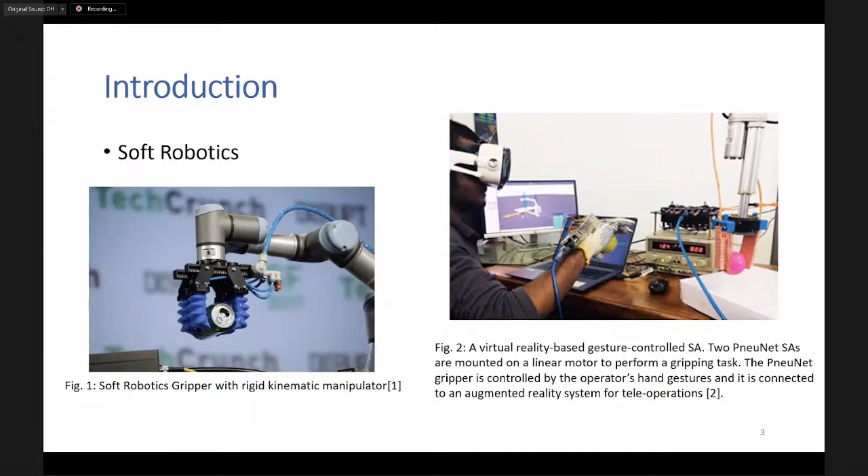So when we discuss parametric estimation of the PneuNet type actuator, we have to know about the bending behavior of the PneuNet actuator. Here is the PneuNet actuator. There are two types of layers in these kinds of soft actuators. The first one is the active layer. It can be used to inject compressed air for bending. And the other layer can be defined as the passive layer. It can be used as a strain limiting layer for the bending process in this PneuNet actuator.

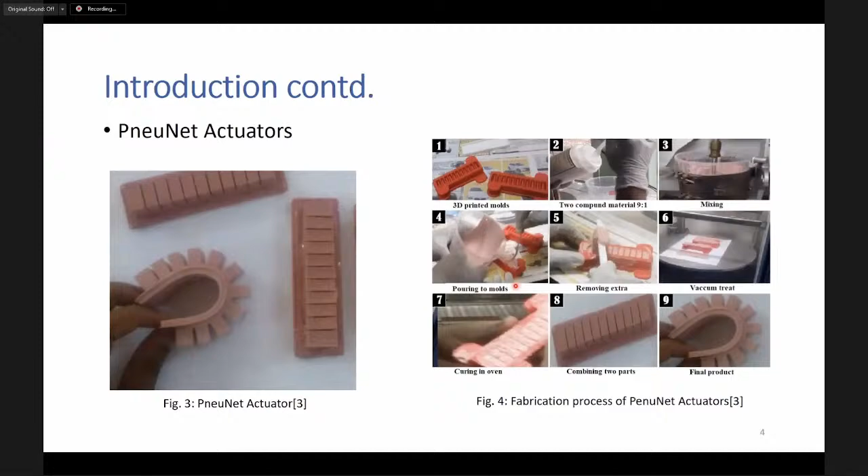So when we discuss lumped parameters of the PneuNet actuator, any physical parameter having an independent variable and not a function of time can be defined as a lumped parameter. From a mechanical point of view, mass, spring coefficients, and damping coefficients are lumped parameters. Also in electrical terms, resistance, capacitance, and inductance can be defined as lumped parameters. In our research, we estimated the spring coefficient and damping coefficient of this PneuNet actuator during its bending process.

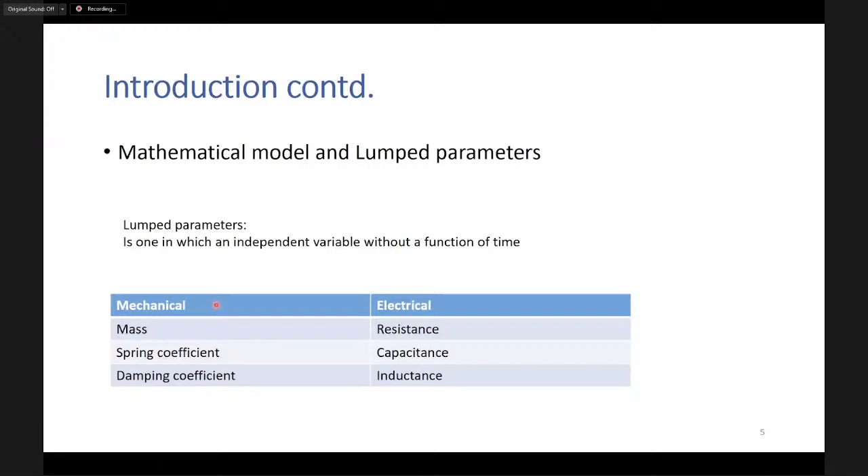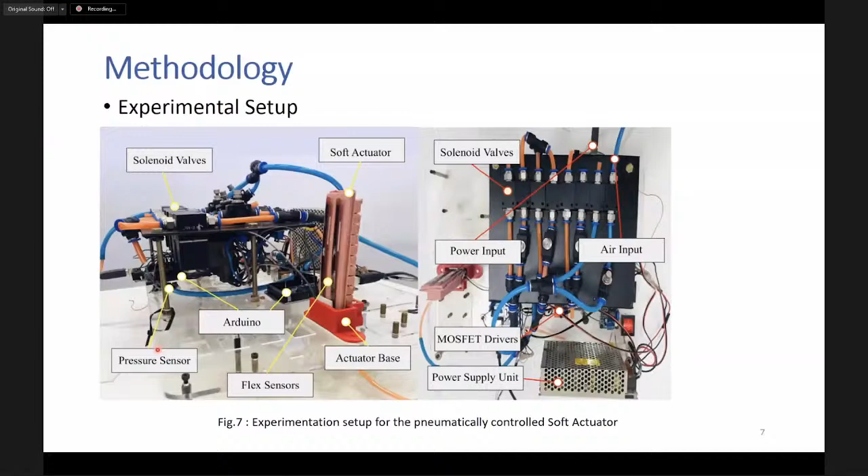In point of view of the experimental setup, we use the PneuNet actuator with flex sensors. An Arduino is used to execute a control algorithm according to our desired input. A solenoid valve and pressure sensors are the actuators and also the feedback to control our bending process.

And you can see a complete video demonstration here. We can define the bending process of this PneuNet actuator according to our desired input.

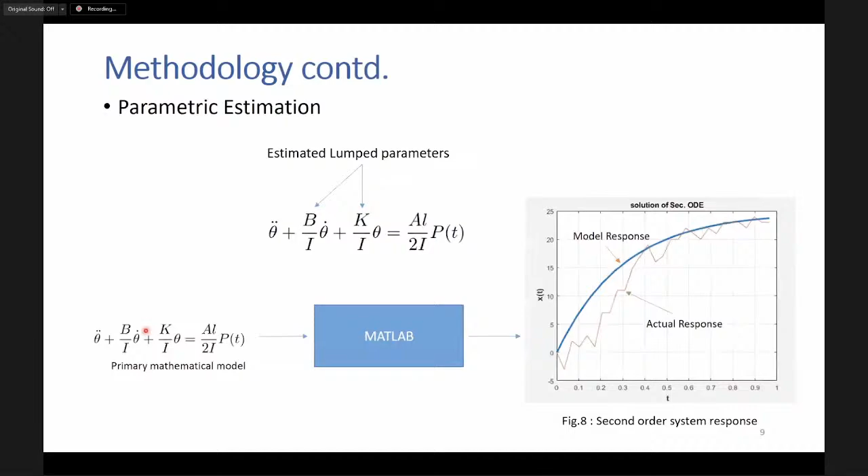In our case, we can control the K value with B constant. Then we can see a special behavior of this curve in vertical movement. And when we control B with K constant, we can control the horizontal movement of this mathematical model.

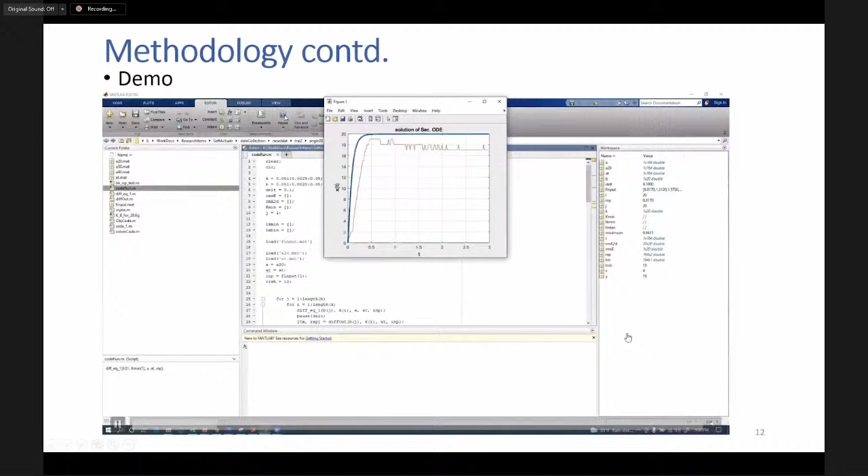After adjusting these values simultaneously using our parametric estimation algorithm, we can obtain a fine-tuned actual response like the mathematical response within this tolerance. You can see this simple demonstration of our parametric estimation process. This is the parametric estimation process, our entire methodology.

You can see the adjustment of K and B during the parametric estimation algorithm, and we obtain the best K value and B value representing a minimum response error using a surface curve. Here we can see an overestimated response, but it already recorded the best value using surface response analysis.

Now you can see this surface response to obtain the best K and B values according to our parametric estimation algorithm. So we can define these K and B values as the final values.

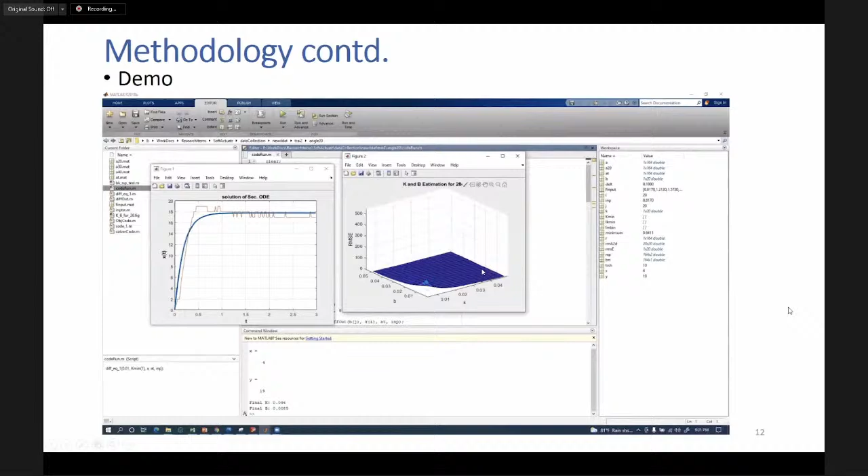When we discuss our results, we have to discuss our main progress. We conducted 3 types of tests. In the first test, we use a step input pressure, obtain the actual response using sensors and the parametric estimation process, and obtain K and B values. Then we calculate the RMS error, root mean square error.

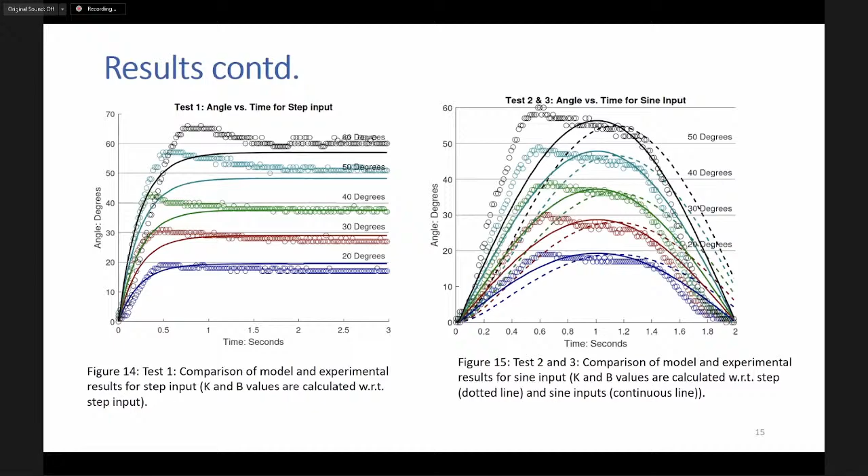In conclusion of this research, this system approaches 80% accuracy with this parametric estimation process. The average root mean square error between the result of the hypothetical disk model and the experimental result is less than 4%. Finally, we can conclude that the hypothetical disk model is an accurate estimator for this kind of finger-like soft actuator.

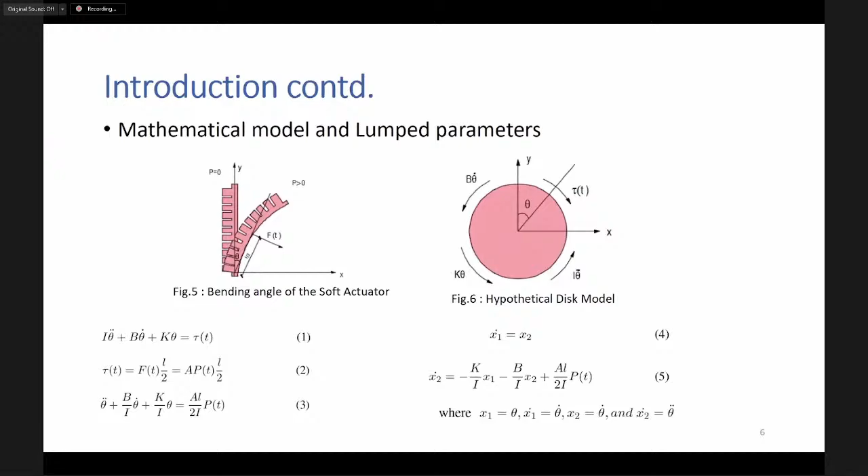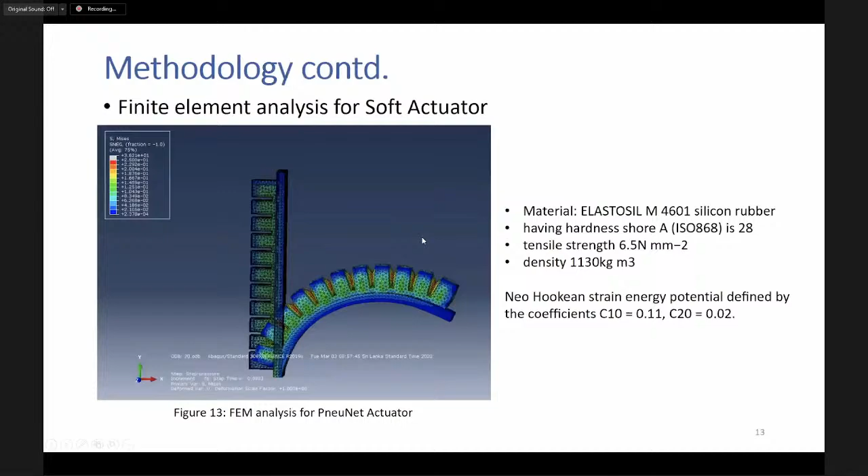On the other hand, we can conclude that this hypothetical disk model can be used as an accurate parametric estimation for this kind of PneuNet actuator.

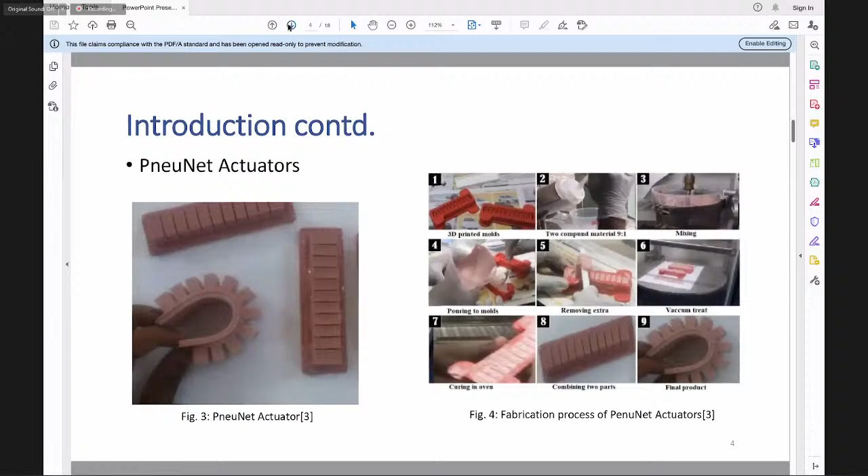Okay, thank you. Sorry for taking too much time. No problem. Yeah, thank you.

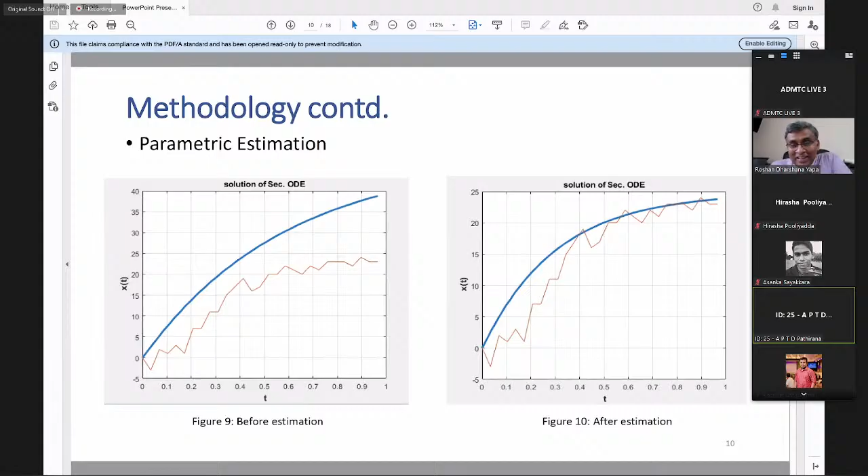I have one question, sir, from the point where Asanka asked the question. If you take those two graphs, how can we physically estimate the parameters? Our main objective should be to match the actual requirement with the simulated model parameters. How is this physically done?

We already gathered the actual response of the PneuNet using flex sensors during its bending behavior. Then we suggest a hypothetical disk model to describe the bending behavior of the PneuNet actuator. We govern a mathematical model to describe the bending behavior of our soft robotics actuator alongside its real-time bending. After that, we consider the actual response as a benchmark to describe its mathematical lump parameters by overlapping the mathematical response of our system.

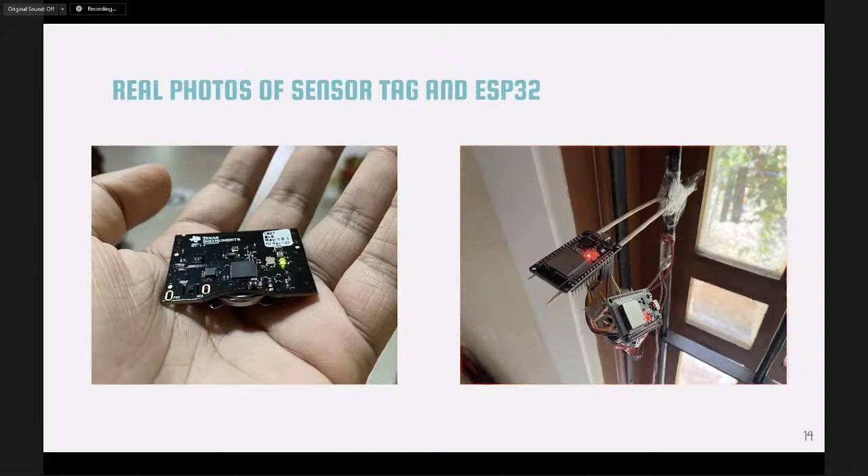The Python program forwards the JSON data to the estimation algorithm and the output is fed into the Kalman filter. The bucket waits for at least 3 similar sequence numbers from 3 distinct ESP MAC addresses to feed the respective RSSI values to the trilateration algorithm. The output is then fed into the Kalman filter and the final position estimation is stored in a database.

After that, the web user interface reaches the database to visualize the position of the end node. Next, we'll discuss RSSI data processing.

First, we must get the coordinates of BLE receivers from the database and send them to the trilateration algorithm along with the RSSI values. Then we need to smooth out the RSSI data to avoid sudden surges and spikes using low-pass filters such as moving average filters. Then the RSSI values are converted to distances and undergo trilateration.

Least squares are used to improve the accuracy of the final estimation. The received JSON objects from the MQTT broker are filtered according to sensor ID and sequence number before feeding into the trilateration algorithm. The distance can be obtained by feeding RSSI values into the mentioned equation.

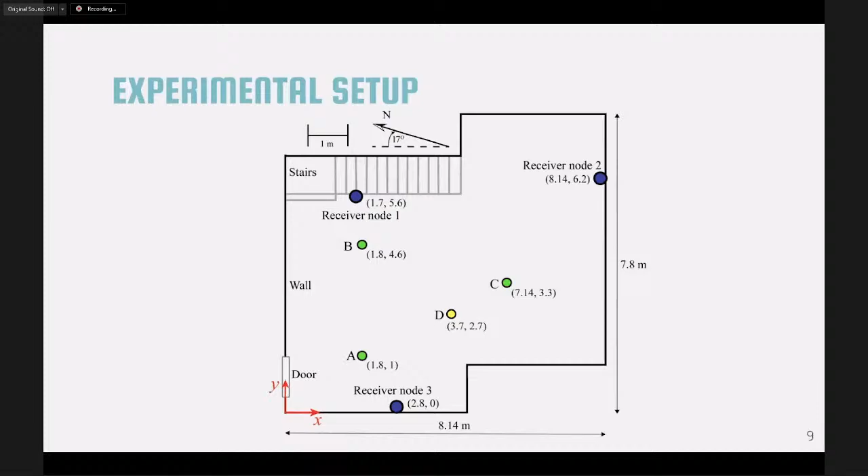The mean error was 1.544, both stationary and walking, and maximum error was 2.32 meters stationary and 3.5 meters for walking. The experiment was done using an end node which did not have an omnidirectional antenna. With end nodes with omnidirectional antennas, the RSSI-based results and combined results would be more accurate.

Another limitation that we faced was that even if the expected data broadcasting rate of the end node was 10 packets per second, the actual data broadcast rate was 7.6 packets per second. It is very important to calibrate the IMU sensors before the experiment, as the noise and the bias of the IMU sensors can impact the accuracy of orientation and the localization results.